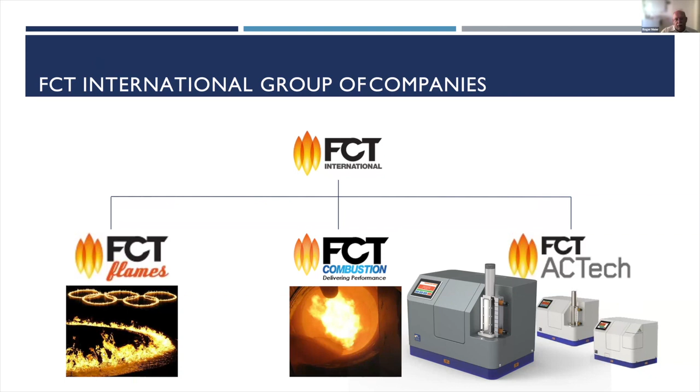And then the company I work for is ACTech, where we build the analyzers for you. And these analyzers, they are a little bit different, but I will come to the details a little bit later. Now, how are we spread on the globe? Our headquarters is in Adelaide, Australia, where we do the manufacturing and the R&D and the setup of the systems. And then we have representations in Europe. My combustion colleague is based in Vienna. I am based in the Netherlands. And then we have hubs in the western part of the Americas and in Brazil.

ACTech was founded in 1999, and the big difference of our analyzers with all the other ones is that we always deliver complete end-to-end solutions. Today we have 8 different products with various applications in the cement industry and also in mining and minerals processing. And I would like to go a little bit later to the details. And here is one selection of our customers that made together with us these products, because we are always on a learning curve, and we try to deliver really the things you need.

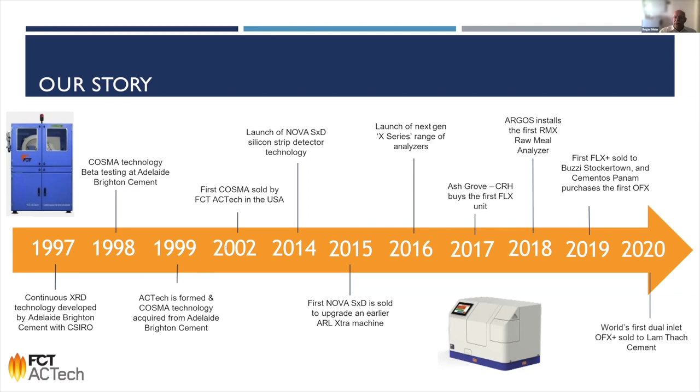So if we look back in the history, then our first online product, the COSMA Analyzer, was developed in a close cooperation between Adelaide Brighton Cement and CSIRO. And in 1999, we more or less formed the company and delivered the first professional XRD online instruments. And then fortunately, over the years, the technology developed, and we got the chance to improve the products. And since 2018, we came to a product range which is, I would say, for process and quality control, the state of the art that you can get today.

And this is also one clear differentiation between our products and all the lab products. We focus on process and quality control. And it's very easy to understand that if you really monitor your process streams, you can easily improve the environmental impact, you minimize waste and rejects, you have a better quality, and this comes together with fuel and energy savings.

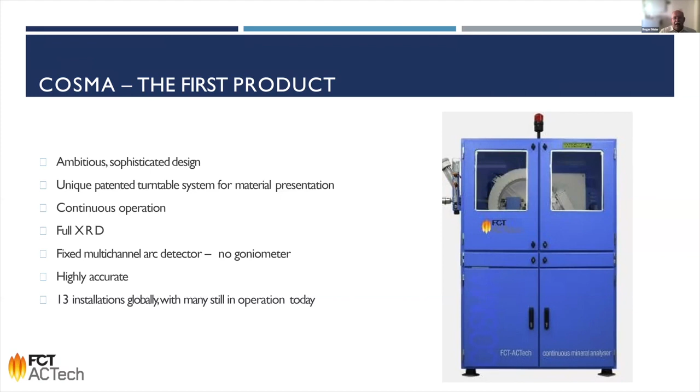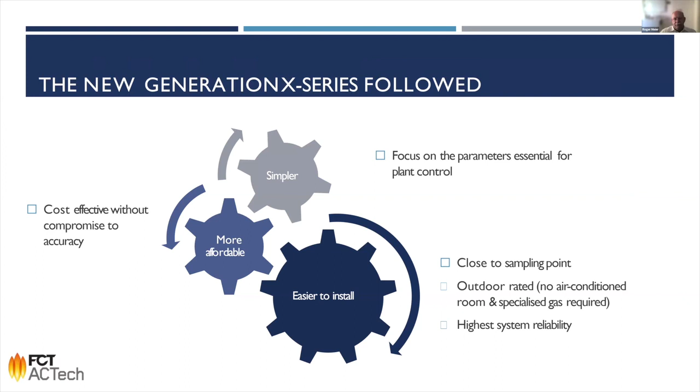If we look now to our first product, the COSMA Analyzer, it was a slightly bigger machine with a full XRD, with a multi-channel arc detector to cover the complete 2 theta range simultaneously. And over the years, we had a couple of installations where the cement industry utilized this technology. But of course, if you start in such a new field, not everything is super perfect. And we had the goal to produce an affordable, simple, easy to install machine that can give you as a cement producer the highest benefits. And I think we came really very close to the absolute perfect solution.

And for this solution, we have to differentiate the specific needs in the process. And for that purpose, we came up with different machines. So if we look through the process, then the first point is after the raw mill, where our RMX, which is an elemental analyzer, can help you a lot to reduce the standard deviation in the process of the LSF and the other modules to get a good control on the raw material. Here we look only on the XRF part, so the elemental analysis.

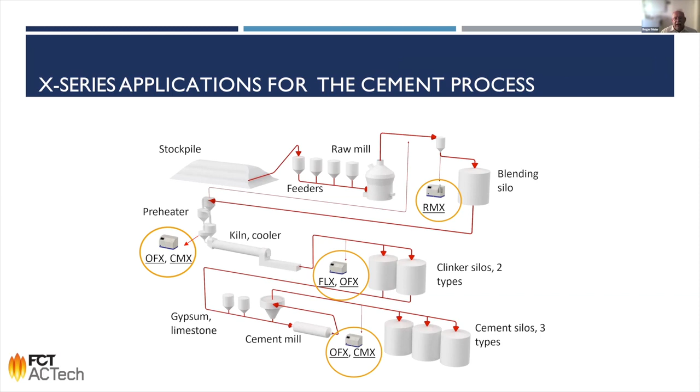Later in the process, we have the OFX, the FLX, and the CMX machine, which I will show you the details about a little bit later, where you get a combination of XRD and XRF to really have a good grip on your process. All the machines are super compact. So for your information, the size of this gray box with the blue bottom is about 80 by 60 by

50 centimeters. And the huge difference between a conventional lab analyzer and our equipment is that we do not prepare an individual sample. We connect our analyzer directly via this tube with a sampler. Of course, we can also do multiplexing to connect it to two samplers to switch between different sampling points. And the material is processed through the analyzer, analyzed in real time. And the material either can be collected for subsequent tests in the laboratory or automatically returned to the process.

So it runs fully without human interaction. You might need about 15 to 20 minutes per week for a little bit of cleaning and looking after the system, but it is not like the very complex installations of a robotic laboratory or other equipment where you really need to have a champion next to it. It really runs fully unattended. And you get a result every 5 to 10 minutes, I would say, which can be directly fed into your process control software or your LIMS system, etc.

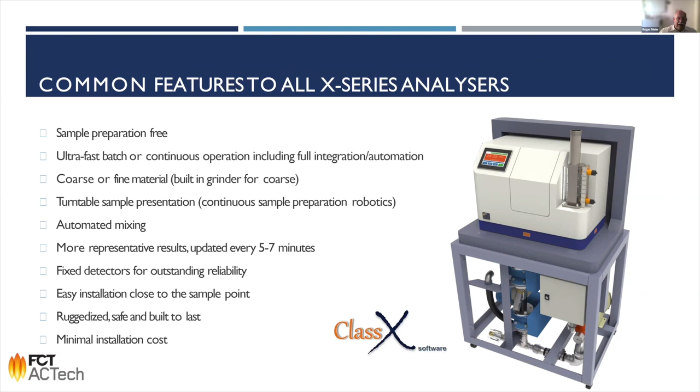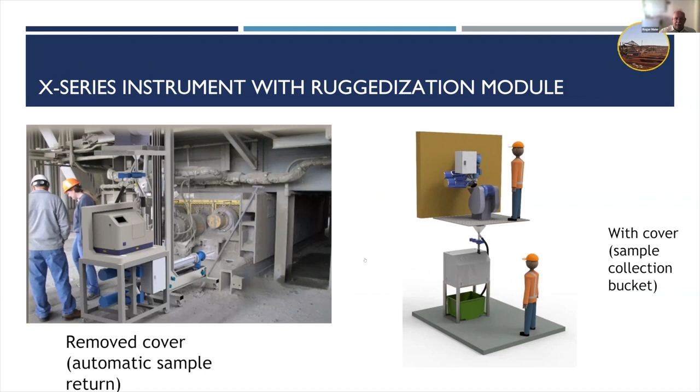It can be simply placed next to the process as long as there is no direct sun or rain hitting the machine. Here you see one typical installation of our FLX, the free lime analyzer. All fine materials like raw meal, cement, etc. can be measured directly. In case of clinker, we use a primary crusher to reduce particle size, and we have an integrated mill inside to have a proper representation of the sample. So how does the measurement work inside? And I prepared for that purpose a short video.

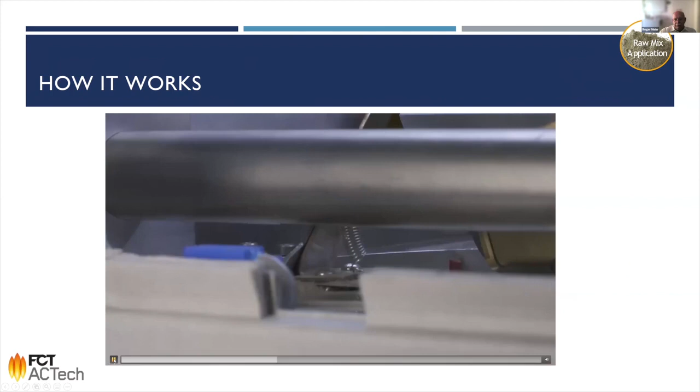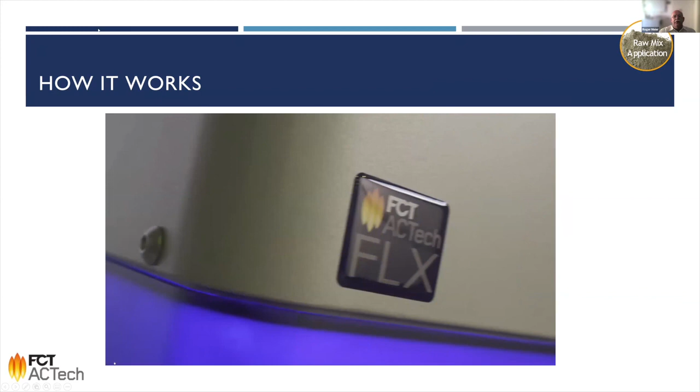In a far larger sample size to have a much better representation of what's happening in the kiln at any given moment. So you see the material moves constantly through the analyzer. And this is also the big advantage of this technology. You don't have a static sample, you have a moving sample. If you compare it with a lab instrument, where usually the amount of powder in a pressed pellet is 10 grams, where you hardly will measure 1 gram of it, we process there per hour between 2 and 3 kilograms, where the majority is measured. So you have a gain of up to 50 times more material being measured, and therefore you have much better information about your process.

Now about the different applications, starting with the raw meal analyzer, which is only an XRF analyzer, which is suitable to measure all the elements from sodium to uranium. And usually for the cement applications, we focus on silicon, iron, aluminium, calcium, sulfur, magnesium, but also other elements on demand can be discussed to be included. It is a constant measurement, so you get a result approximately every 5 minutes. We steer the sampler in a way that either we use a bypass system or we switch it on and off by looking at sensors, so that we always have fresh material in the analyzer.

And the benefits for you are, I think, very obvious: having a very low standard deviation in the feed of the kiln, you reduce the fuel cost, you need less energy, you avoid a lot of issues. It will have a very positive effect on wear and tear. Maybe, and this depends on the installation and your design of the plant, you need less homogenization. But you have also further down in the process a lot of advantages. For example, this can lead to a reduced energy consumption in the cement milling process by having a more consistent material.

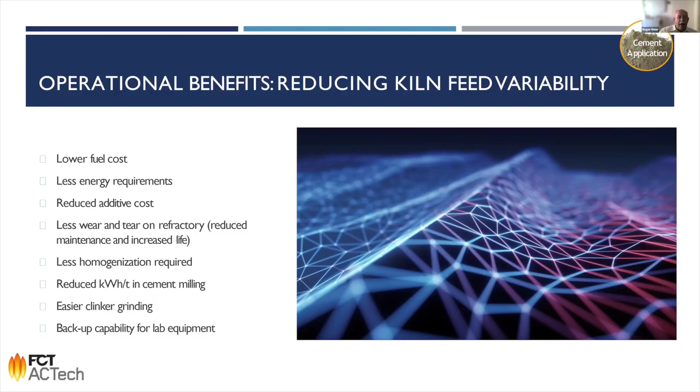In the next step, more or less, we switch from the XRF to the XRD part. This is the free lime analyzer, which is usually positioned after the clinker crusher, after the sintering process, to see the free lime as an indication of the burning conditions in the kiln. And this analyzer uses only the XRD technology.

For those that are not very familiar with the two different techniques, with XRF, you measure elements. With XRD, you measure mineral phases. One good example to illustrate it a little bit is if you take a piece of coal and a diamond and you do XRF, you will find out that both are built based on carbon. But if you look at the mineralogy, so the XRD signal, you see a different structure. And the structure is usually directly depending on or predicting the properties of the material. Therefore, mainly after the kiln, you look more at the properties, and there XRD has a high added value.

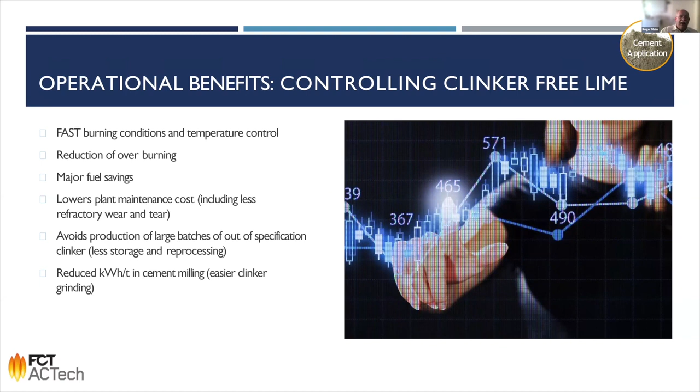And the advantages are very similar to the RMX. So reduce energy consumption, have a more smooth process, and reduce the emissions.

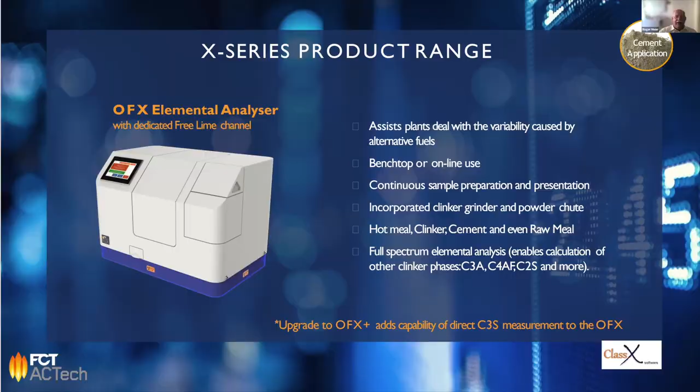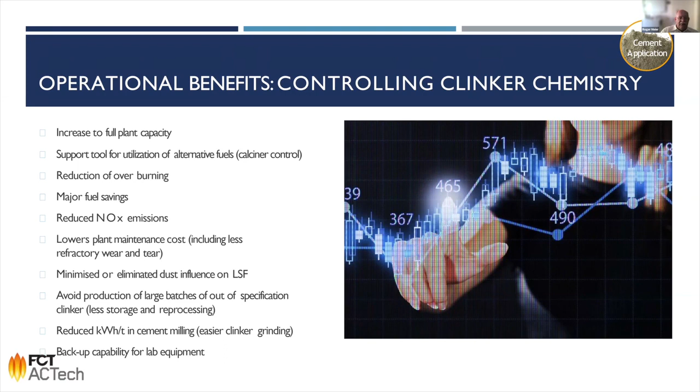If you go later more down in the process, or also at that point, you can use the OFX, which is a mixed analyzer. It has 2 X-ray tubes and 2 detection systems to be able to measure the mineralogy and the chemistry. And this gives you the full picture of the composition of the materials, and you can really tune the process in a way that it's super efficient, but that it's also sharp at the target values, not to waste energy. But you guarantee at the same time that you are on spot and your customers get the materials they expect.

And then the last system in the process, which I want to introduce to you today, is the CMX beta cement analyzer. It is a machine which is tuned for the analysis of the cement after the cement mill. It comes with a larger XRD capability, so it can measure, besides the free lime and the alite, also minerals of interest like gypsum and calcite, but it can also measure elements like chlorine. And with this combination, you have a very, very detailed look at your material, and you can tune all the parameters you would like to tune to have a perfect quality control of your final product.

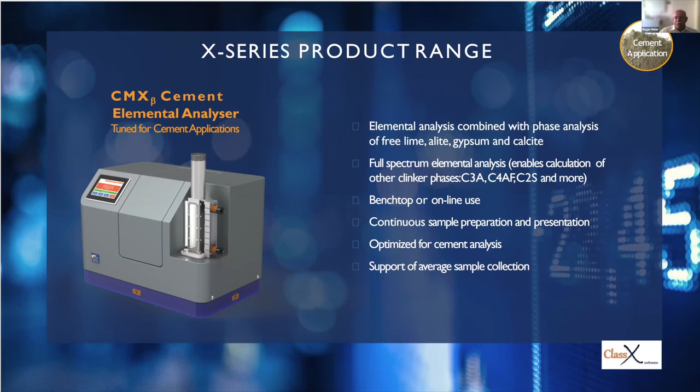And this opens for you various possibilities. On the one hand, you can reduce the clinker factor, which directly leads into a reduction of the CO2 emission. But it can also be used to add some other additions like bypass dust to the normal or expected limits so that you don't get an overshoot of the chlorine, for example. You can also use it on the process side, as this real-time instrument gives you very important information when to switch between different cement grades, so that you do not waste the expensive product in the wrong silo.

Overall, by looking at all these parameters, it enables you to reduce the wear on all the heavy equipment by running the process more smoothly. And of course, the new cements, in particular the things we heard yesterday, the PPC cement with fly ash addition or composite cements with fly ash and slag, these types of analyzers are mandatory to be sure that the quality you deliver is in spec and you give your customers the things they would like to have. And last but not least, by controlling the cement in a much better way, this can also help you ask a premium price for your product.

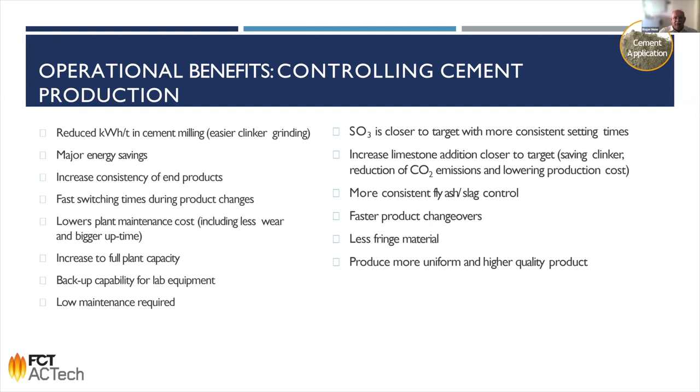So I hope with these couple of slides, I have shown the added value of our instruments, in particular to be more efficient, to reduce the CO2 emission, and to have a very good grip on all steps in the process. There are some more possibilities which, for time reasons, I didn't include in the presentation, but please feel free to contact us or some of my colleagues so that we can discuss where the pain points are in your process and where our equipment could help you a lot.